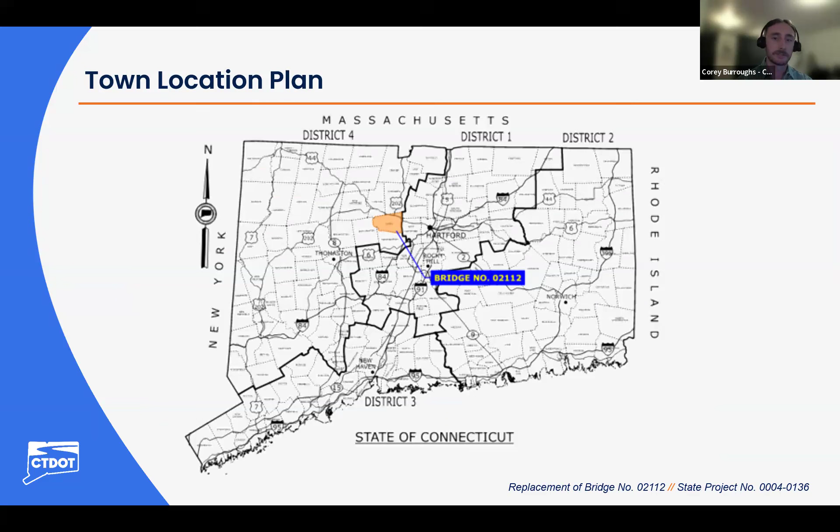I will now hand over the presentation to Kathleen Ericson to discuss the rights-of-way process.

Thank you, Corey. My name is Kathleen Ericson, and I'm a project coordinator with the department's Division of Rights-of-Way. Our office is responsible for acquiring property rights needed for transportation projects throughout the state. As you'll see in this presentation, this project will require the acquisition of property rights, so I'd like to give a brief overview of what the acquisition process looks like. Before I get further into that, I want to mention that the specific property impacts for this project are still being finalized and may change as the design progresses. Also, any required property rights will be acquired in accordance with Connecticut General Statutes Sections 13A-73 and 13A-98E, as well as the Uniform Act. Next slide, please.

The right-of-way acquisition process begins once the design has progressed to a development milestone and all of the impacts for the project have been determined. At that point, each affected property owner will receive from our office a formal letter of intent to acquire, along with a property map which depicts the exact property rights to be acquired. On the screen here, you can see a sample of what those property maps look like.

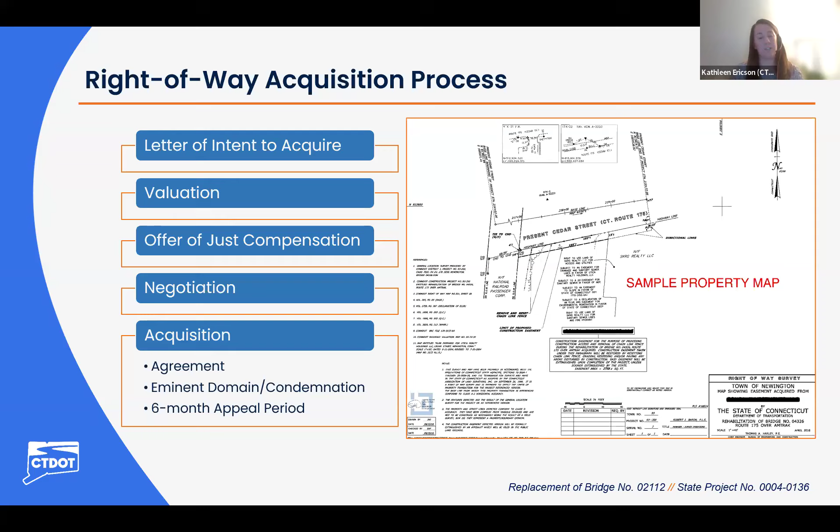Thank you, Kathleen. My name is John Wengell. I'm from CHA, the project manager for the CLE on this program. I'd first like to start off with a quick overview of the project.

Bridge 02112 was built in 1927. It is an 8-foot single-span bridge consisting of a concrete slab on stone masonry, abutments, and wing wall. The current roadway width is 30 feet with an average daily traffic of 15,000 vehicles per day.

The project purpose is to address the structural deficiencies of State Bridge number 02112, which carries Route 10 over an unnamed brook in the town of Avon, to accommodate safe travel for all facility users on the bridge and proper conveyance of the brook water below.

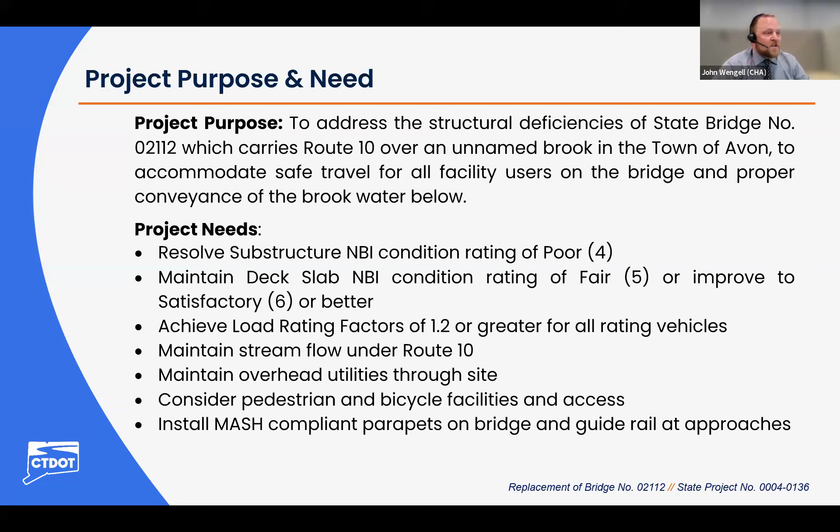Some of the project needs are to resolve the substructure NBI rating of 4, which is poor condition, maintain a deck slab NBI condition rating of fair or improve it to a satisfactory level 6 or better, achieve load rating factors of 1.2 or greater for all rating vehicles, maintain the stream flow under Route 10, maintain overhead utilities throughout the site and during construction, consider pedestrian and bicycle facilities and access, and install MASH-compliant parapets on the bridge and guide rail at the approaches.

The National Bridge Inventory NBI rating scale can be seen to the right and ranges from 9, which is excellent condition, to 0, which is a failed condition.

Our project need is to raise the NBI rating to a 6, or satisfactory rating, or greater for all our condition-related items. The condition rating is a judgment of a component's condition compared to the original as-built condition, which is also used to provide an overall characterization of the general condition of the component being rated.

Now I'd like to hand the presentation over to Mark Habeck, the project manager from Benesch Consulting.

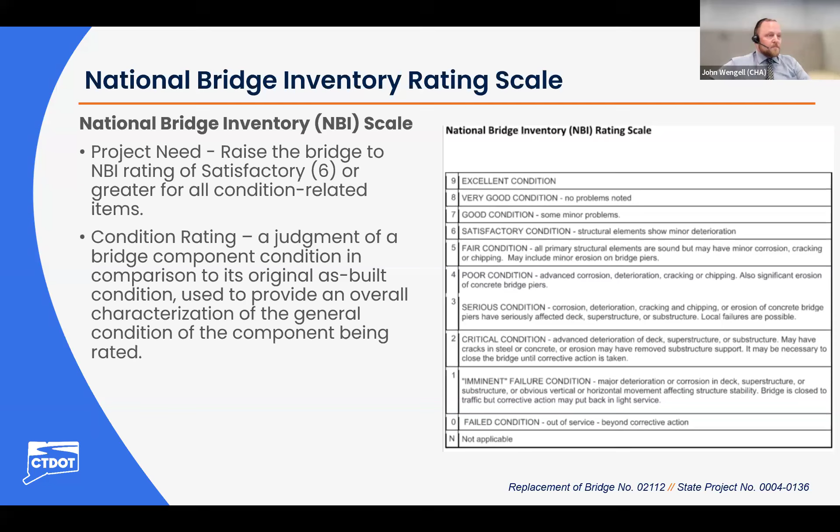Thanks, John. We'll start by looking at the existing conditions of the superstructure for the bridge. Shown here are some photos of the concrete upstream rail base, the underside of the bridge deck, and the downstream fascia. As you can see, there are deteriorations here, spalls to the concrete with existing rebar shown.

These deteriorations to the bridge structure contribute to a rating for both the deck and the superstructure of a 5, or fair condition.

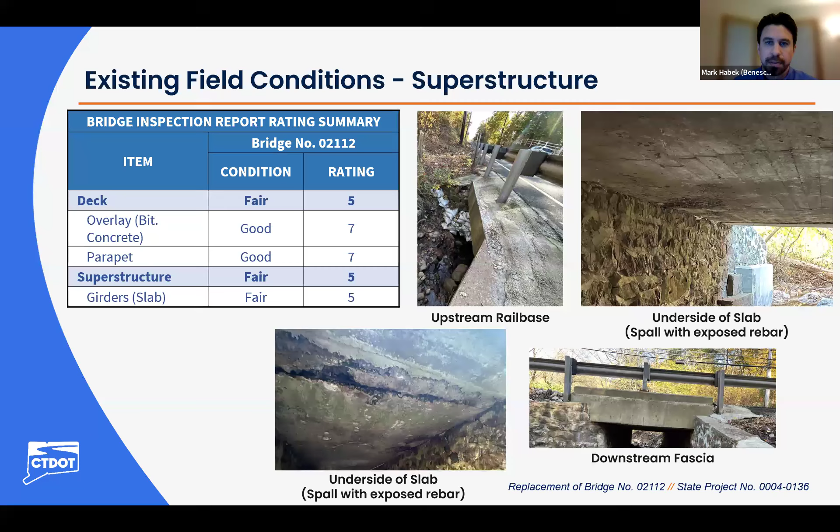Getting into the proposed plans, this is the proposed roadway plan for the project. As you can see, the proposed bridge is shown in orange.

The stream or watercourse is shown in light blue, and the proposed full-depth construction for the roadway portion of the project is shown in yellow. The green shaded areas are the proposed grading, which will be required for the widening of the roadway, which I will get into in a few slides when we look at the proposed roadway section.

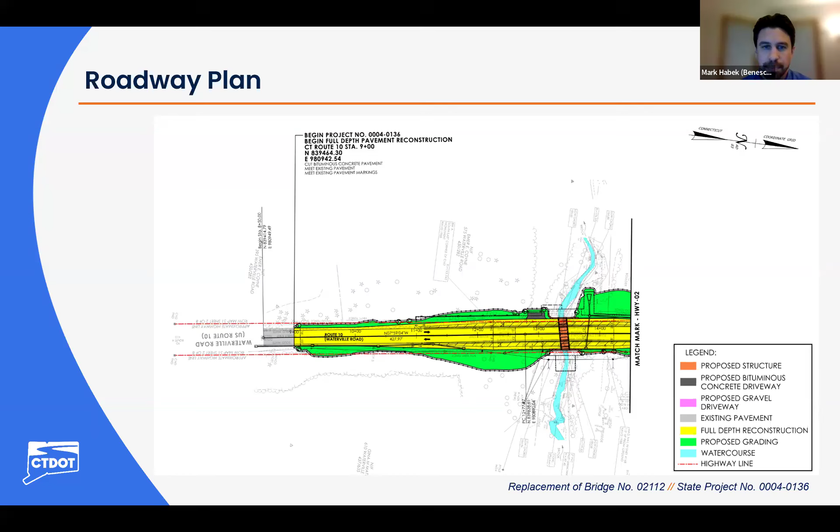This is the remainder of the project limits, the northern side just to the north of the bridge. Again, you can see the full depth reconstruction shown in yellow for the roadway and the proposed grading shown in green. Proposed work to the bituminous concrete driveways in the area is shown in dark gray.

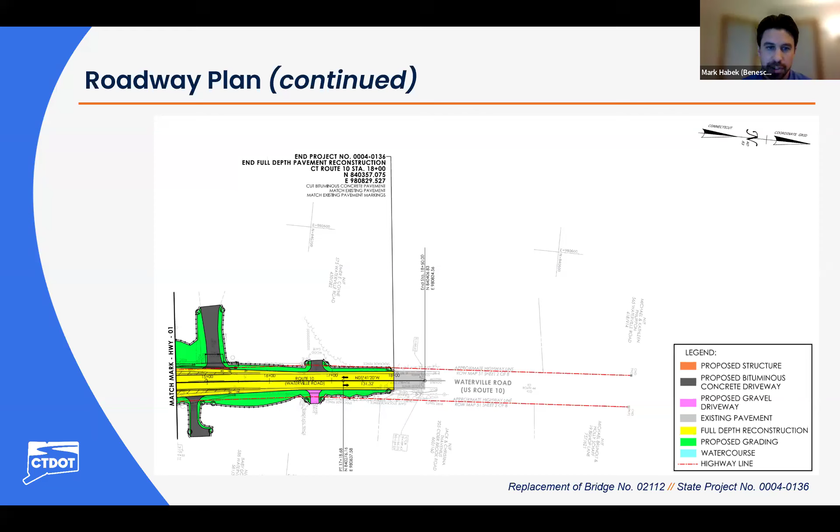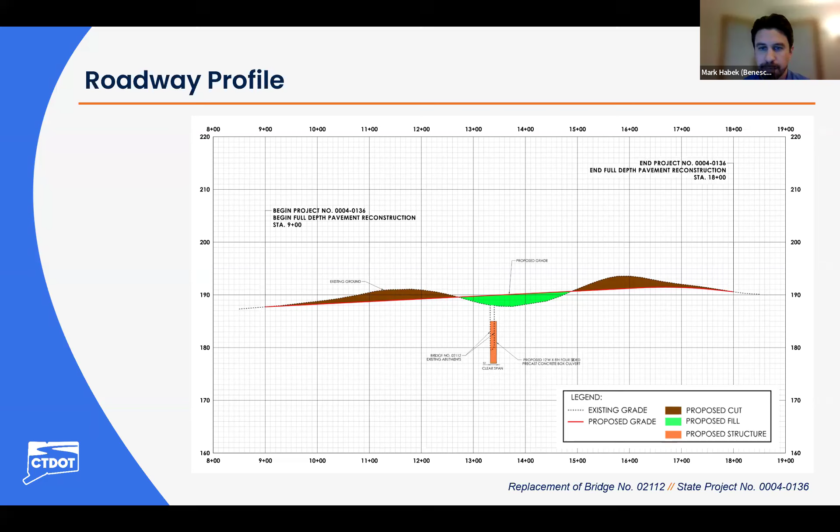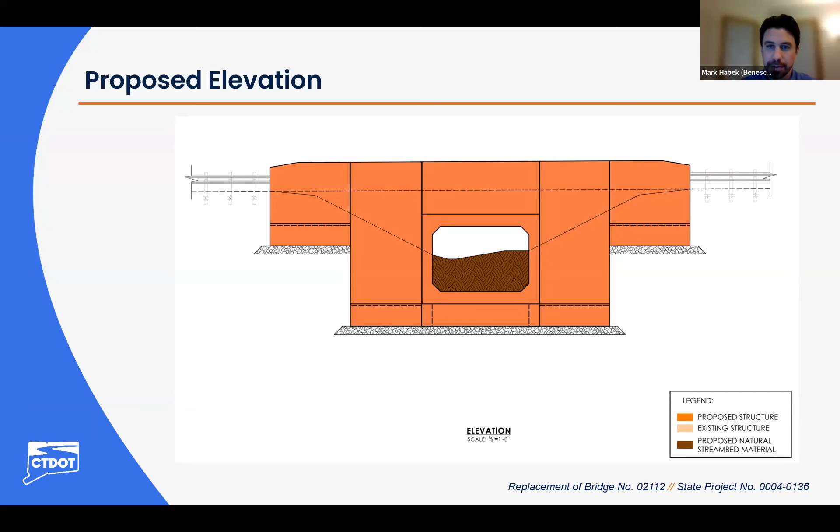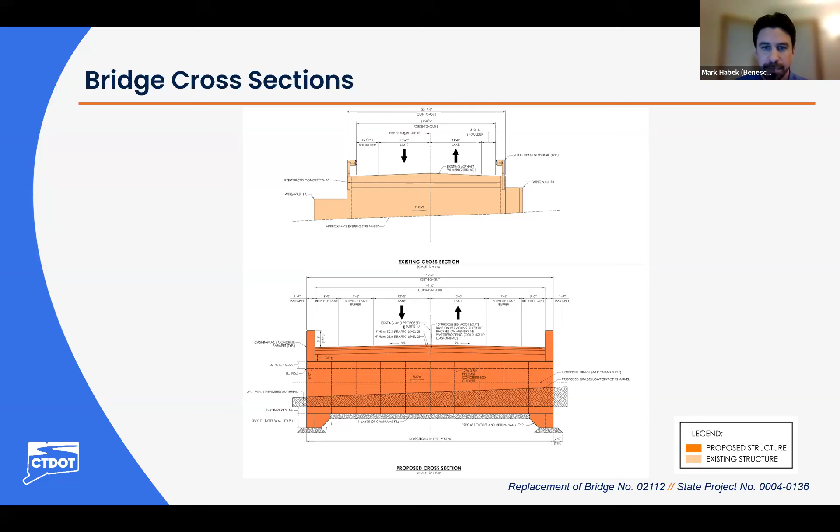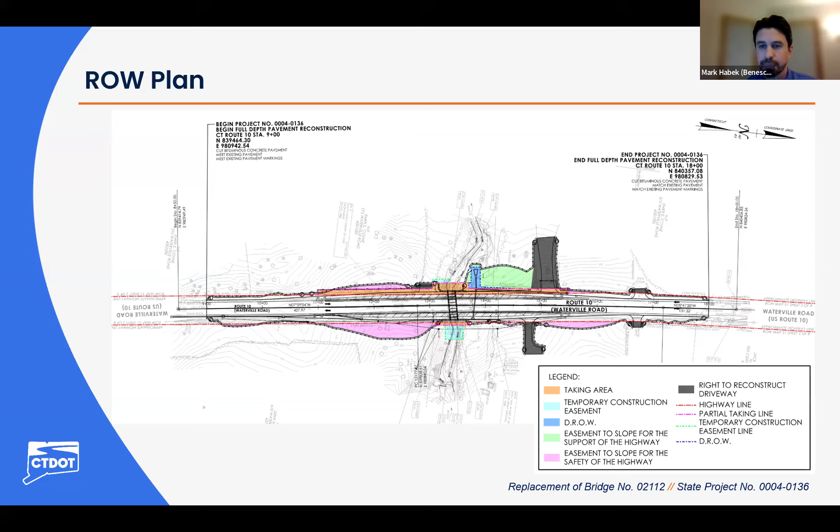So getting to the project schedule and construction cost, construction for this project will begin in approximately 2 years, the spring of 2027. The project will be 1 construction season, so construction will end in the fall of that same year, 2027. The estimated construction cost for the project is about $3.2 million.

This will be made up of 80% federal funding and 20% state funds. So with the federal and state funding making up 100%, work will be done at 0 cost to the town of Avon. Again, these numbers are preliminary and subject to change, but these are the current estimates for the job.

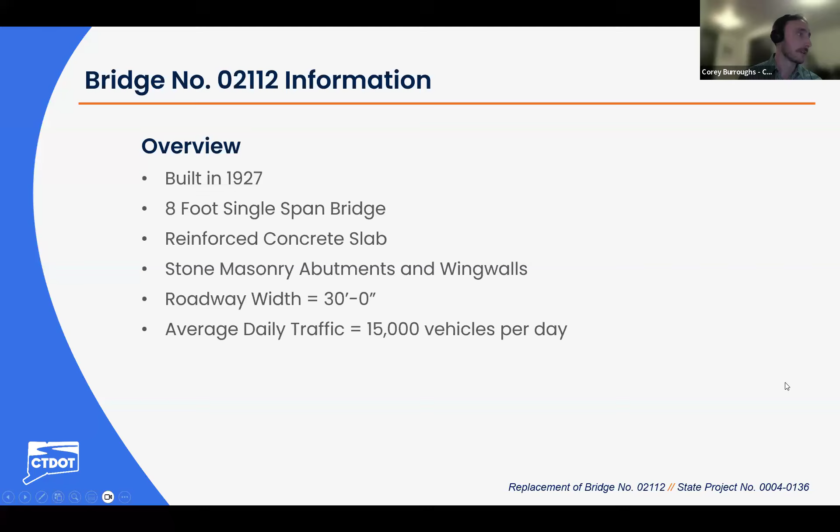So this is located, sorry, between Talcott Notch Road and... John, what's the road to the north here? It's Avon Old Farms Road, right by the Fisher Meadows Recreational Area.

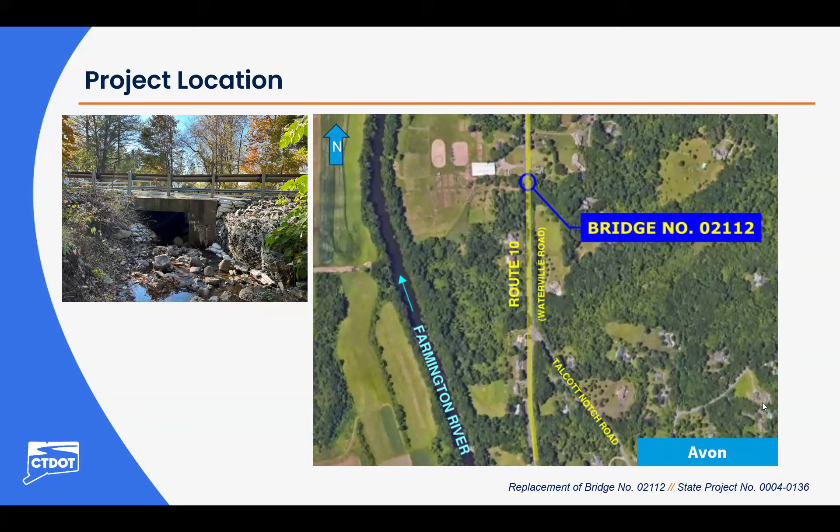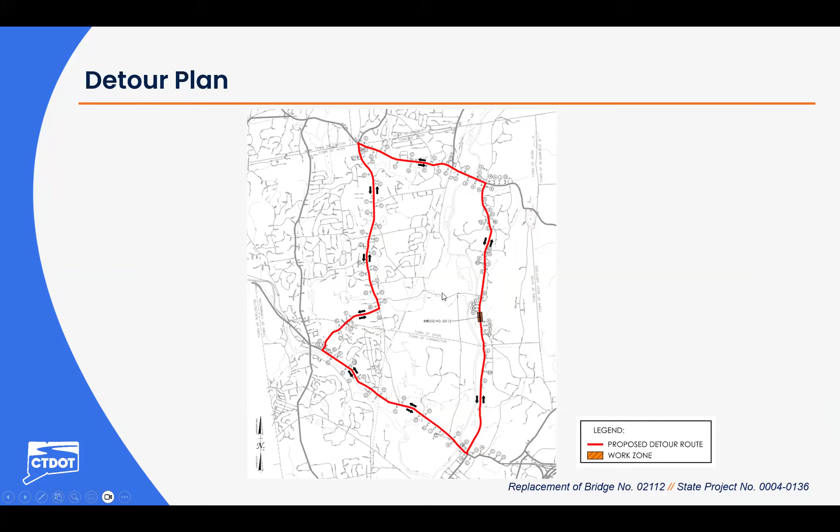I'll go down to the detour map so they can have a larger view of where this is. The project is located just south of Old Farms Road and just north of Talcott Notch Road. Thank you, John. You're welcome.